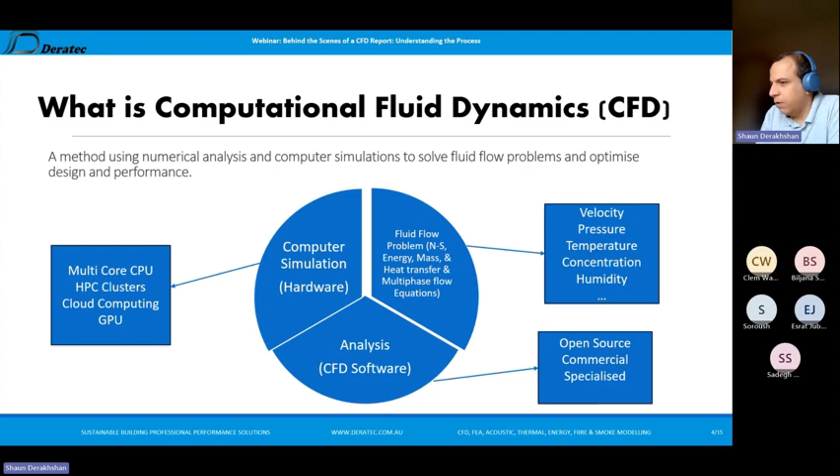We'll talk more about the softwares, just these few - I'm not saying I'm covering all CFD softwares in the market now, there are a lot more, but I selected some as examples. Autodesk CFD we are using is user-friendly, great for building and especially HVAC. It has challenges, limited in advanced turbulence, but it's design focused for a project, so it is very good for industry application.

ANSYS Fluent, well-known, and ANSYS CFX - highly accurate, advanced simulation, but expensive. Steep learning curve, not just user-friendly, a lot of modules, and it's very difficult, but it's best for complex simulation, more academic or cutting edge, or for industry if we have something very special case.

OpenFOAM, I said free and open source. It means free, but requires programming expertise in addition to CFD expertise - you need Python or whatever. It's customized application again - you can use OpenFOAM for very simple jobs or complex physics and customized ones.

Star CCM is for multi-physics, so it's when your phenomena is complex, very costly, and high fidelity simulations. SimScale just recently came to the market, maybe last 5 years.

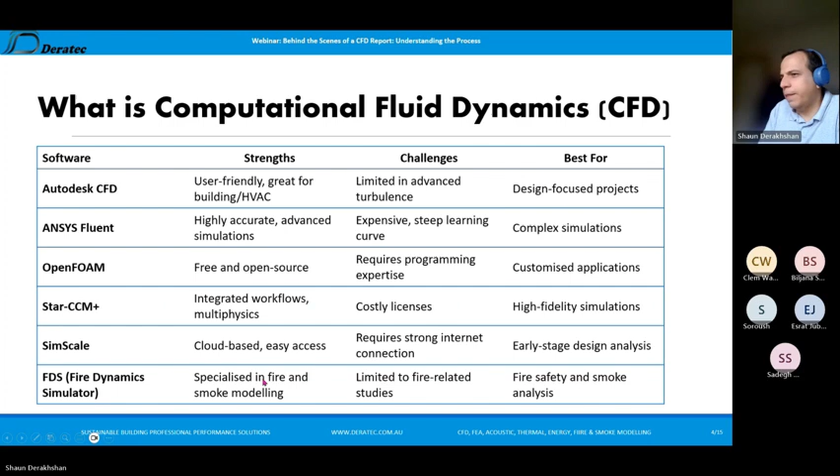So how to choose? Again, it depends on the application you need and also budget, a lot of parameters, and operator expertise. For example, learning new software is time-consuming, especially complex ones. Here at Deratec, we are using Autodesk CFD for reliable, cost-effective building simulation and FDS for fire and smoke.

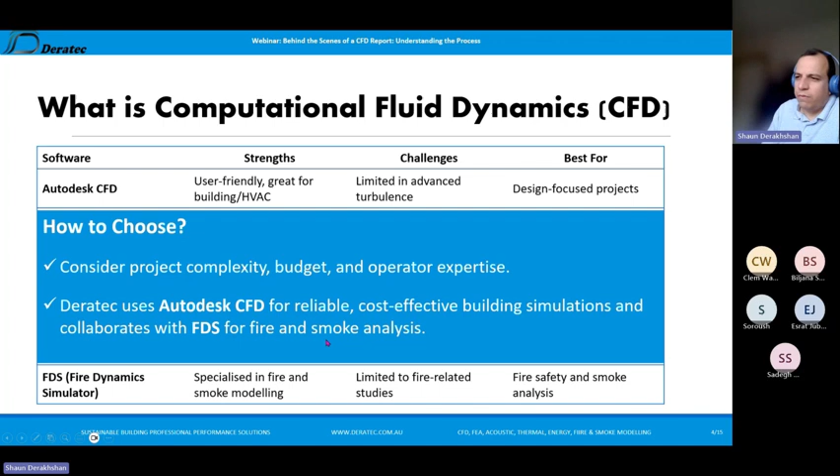So how does CFD work? First of all, we need to define project requirements. Identify, for example, when I'm using ventilation as an example here, identify ventilation needs, goals, and compliance with NCC or AS 1668.2.

So we need to define, for example, a car park or whatever we are looking after. The client or whoever is looking after it sends you something like a plan, maybe a jet fan or supplier information, whatever it is, just an initial design. We try to figure out what the goal is: first, meeting the standard, and second, and most important, saving money, saving costs. Don't forget, we are using CFD to save costs for our client, not just adding costs.

You can see here the jet fan and CO emitter, as a car moves and we have CO. Depending on the project, simple or complex, we need to convert drawings and project input into this 3D model, but kept simple, because CFD needs simple geometry.

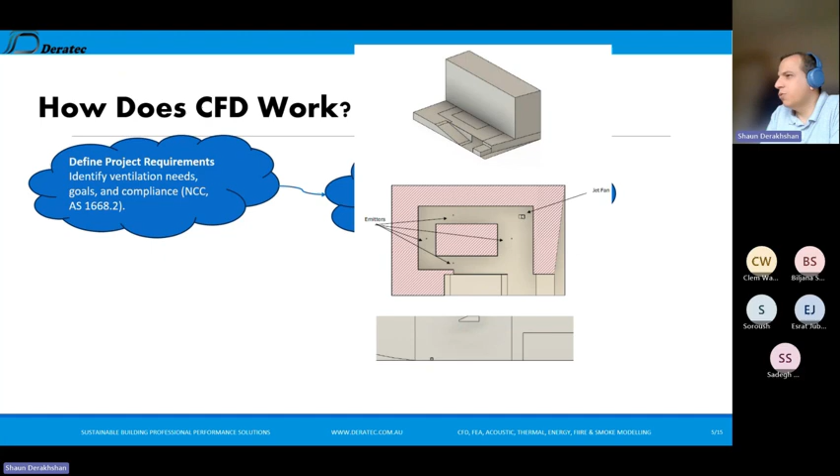Then we start CFD modeling. First is boundary conditions, setting up the model, mesh generation, and then the method, whether transient or steady state - a lot here is a big step, so it needs expertise and knowledge.

Everyone just claims 'I'm a CFD engineer, I can do it.' You need experience and knowledge, especially experience in that specific field, not just general CFD experience. For example, if someone comes to me to do CFD for biomechanics of the heart, definitely I can do it. But if they can find a CFD engineer with a biomechanics background, definitely he or she can do better. This is important - so for example, I'm not just a CFD engineer, I'm a ventilation engineer or mechanical engineer.

So these two combined help the final report be very practical and highly efficient. Normally our reports are approved straight away by the client or consulting engineers because we know what to do.

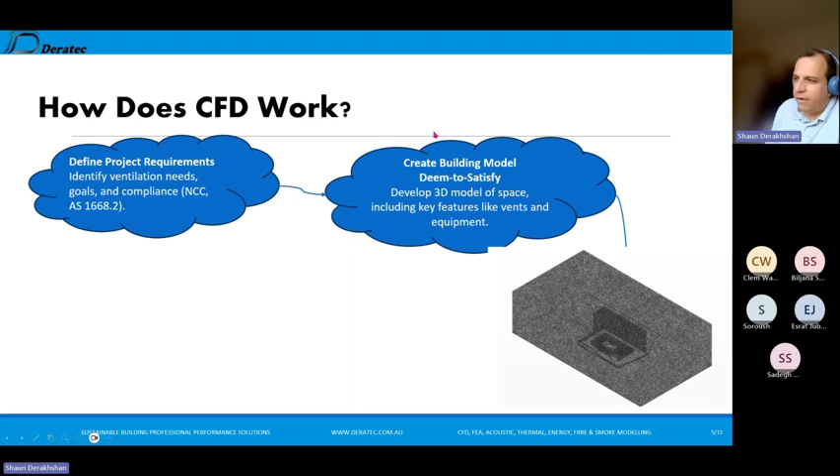So here is the domain. For solving the Navier-Stokes equations, we need to discretize the domain, and each cell or node needs to be solved by software and definitely hardware. For example, 2 million, 3 million meshes - this is the reason it takes time, from a few hours for simple geometry or simple problems, to, for wind comfort, we simulated for the whole of Sydney or part of Sydney.

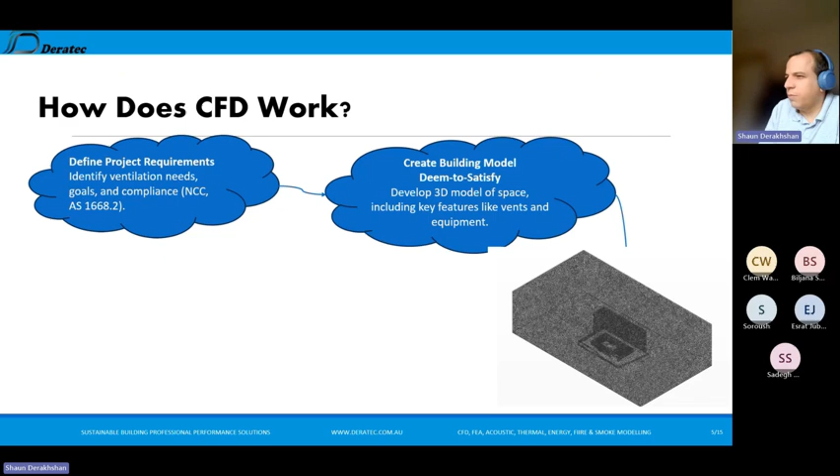It took around 72 hours with cloud computing, with Google Cloud, not just my computer. It was around, if I remember correctly, 30 million meshes. So it depends on the complexity - time will be different. This is the reason price is also different. This is the time involved.

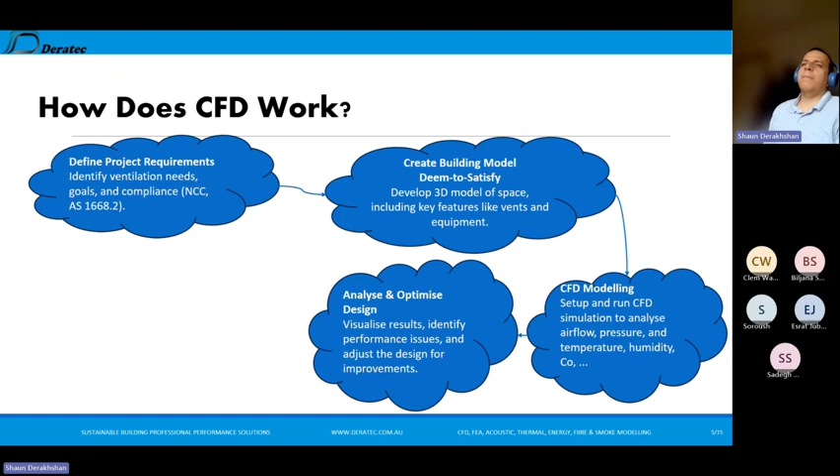So then we have post-processing, we do some analysis and have a look. If we need to optimize, we change geometry, we change parameters. For example, jet fan position, or adding or decreasing jet fans, to get the best result to meet the standard, and again save cost, because we don't want to add cost to the project. In some cases, yes, costs increase because struggles happen, but in most cases we need to save money for our client.

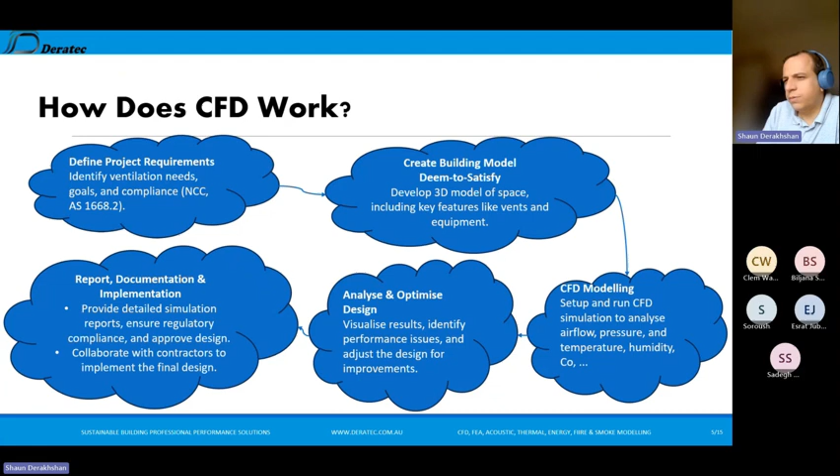And then report and documentation. It can be very detailed or simple, depends on the client. Some clients prefer a simple keep-it-stupid-simple strategy, just simple to understand. Some clients think a professional report means a detailed report. I'm not judging, it depends on the client. Report can range from very simple to very detailed. This is just an example, and then the report is sent to the client.

Benefit of CFD - again, the target is saving money, higher efficiency, and sustainability. These are the three main things we need to consider when doing a CFD report.

Starting from design: normal design by consultant is deemed-to-satisfy, not optimal design. This is an expensive solution for contractor or builder, and they call it 70-80% design. Most of them copy from other projects because they don't want to spend time, and just leave it to the contractor, subcontractor, or supplier to do the rest. So most projects need us to have a look and spend time to optimize - for saving money, higher efficiency, and system performance.

So we propose a design - client purpose, or an alternative design or performance solution to meet this goal. What are the tools? NCC accepts CFD analysis as a verification of this design. So again, we need someone with knowledge, experience, and qualification to certify - a chartered engineer or practitioner for class 2 buildings, for example.

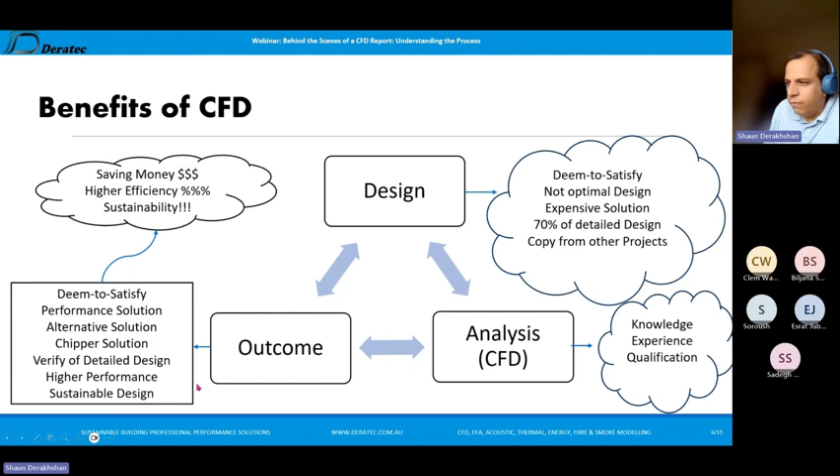Sometimes we're not looking for saving money, we just want to verify the design. For example, a fussy consultant engineer wants to verify her or his design for higher performance or sustainability - for example, you want to meet a higher Green Star certificate, and your solution doesn't meet that, so we review and help you reach it.

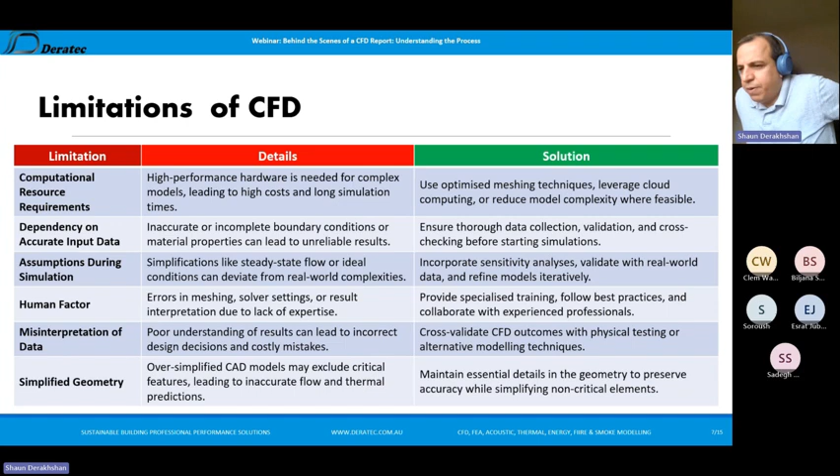So every good thing also has limitation - it's in the word itself. We don't have perfect things, so CFD also has some limitations.

The most common limitation is resource requirement. My challenge when talking to clients is that they struggle to pass accurate inputs. When we have accurate input, this can lead to reliable data, and unreliable input leads to unreliable output. This is very important - when we start a CFD project, all information needs to be passed to the CFD engineer.

As for resource requirements, hardware is challenging, but I'm not worried about that because a lot is coming - we have cloud-based solutions, and hardware is improving a lot. So now it's not a big problem, maybe only for very huge urban simulations, or where you need a very huge or very tiny mesh. This isn't a problem for ordinary jobs, only for big problems.

Assumptions during simulation are very important - for example, deciding steady state or transient, and you need to validate your assumption. Is the result reliable or not? Because we're always simplifying, we're trying to optimize - it means you get a good result with simplicity. It's not worth making the problem complex just to get a result.

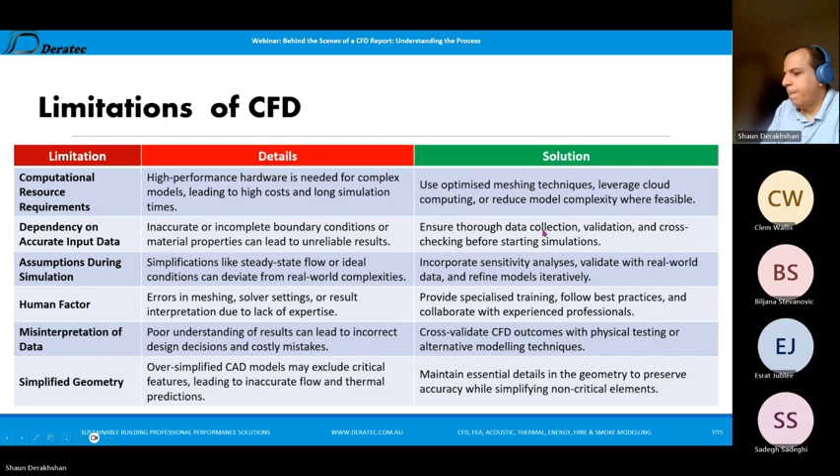Future of CFD. So I started CFD in 2000. The first code I wrote was in Fortran, and at the same time I bought this Nokia phone. Now in 2025, we're talking about smartphones, iPhone or Samsung, whatever. Traveling 25 years in the phone industry, getting from this very good, reliable Nokia phone to now, it's fun to look back.

But the question is, in 2050, what will happen in the phone industry or communication? Maybe each of you have an idea. I don't know.

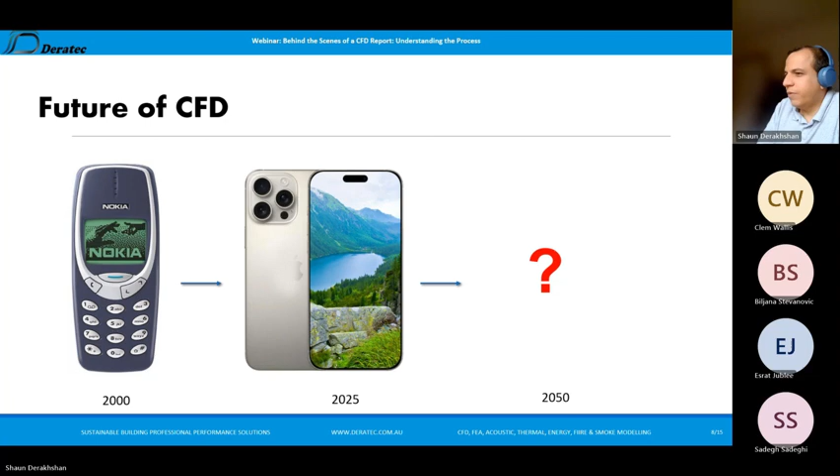Similarly, in 2000 I wrote 2D code with Fortran for NACA 0012. It was very challenging, just with a Pentium processor, a lot of challenge to get this simple result that now I can do for you in one minute.

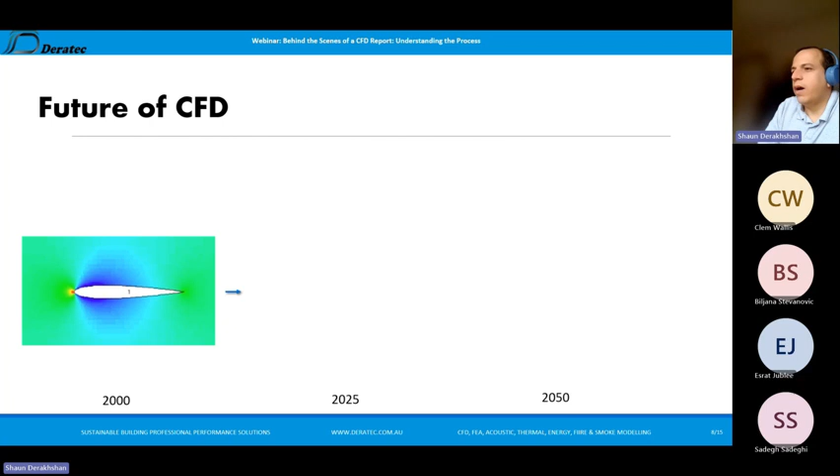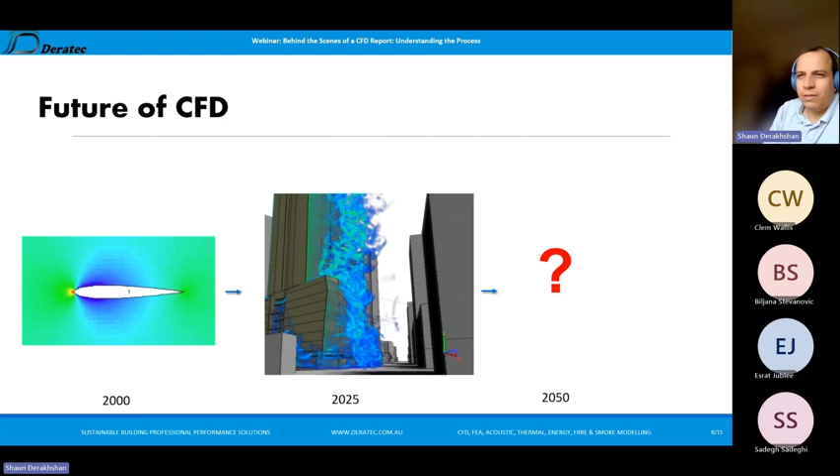In 2025, we are able to do 3D simulation for urban wind simulation, even more complex. And again, the question: what will happen in 2050, in 25 years? This is important to know, because as a CFD engineer, or you as a client, you should know what's happening in the background in CFD development.

Also integration with IoT, for example real data, installing sensors - it is my favorite one, smart buildings. This will happen a lot in this area in future. For example, at the same time with glasses or your phone, you could see real CFD, look at the louvre, and see the airflow come in and where the simulation is going.

No need to ask, call me and say 'Shaun, can you simulate this for me?' No, just with some simple app or simple glasses, you can see the real phenomena happening. Okay, maybe it's not 100% accurate, but 50% is enough, because you just want an estimation in your design or installation.

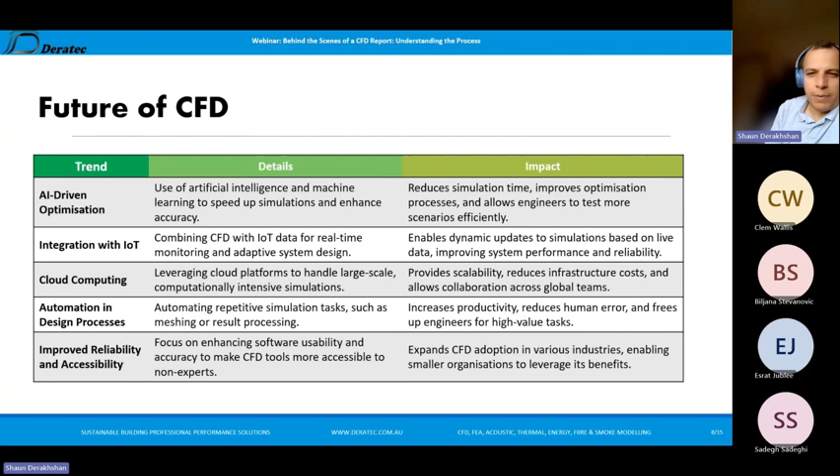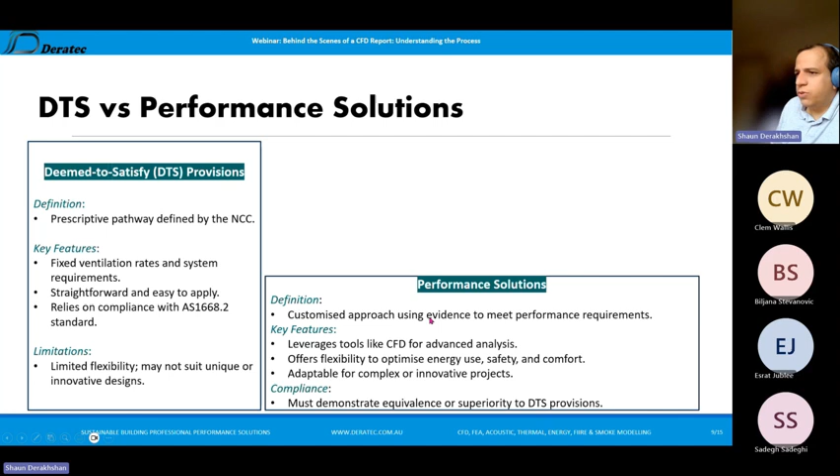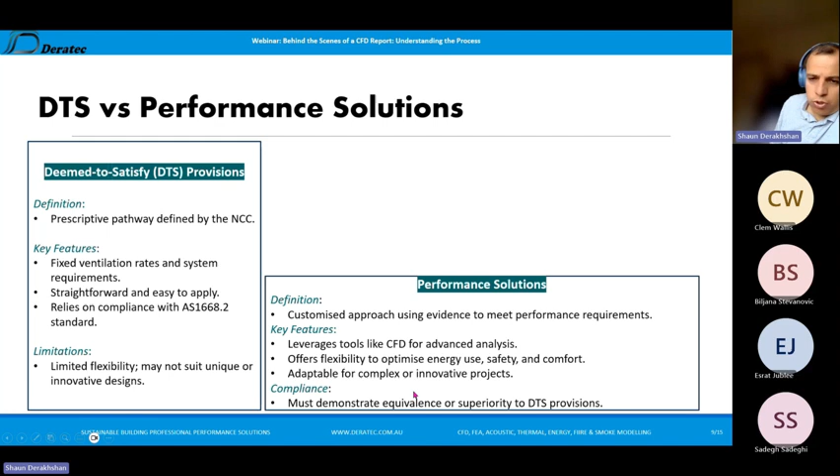You're all familiar with DTS and performance solutions. DTS is just something that's fixed - for example, ventilation with a fixed ventilation rate, straightforward, relying on standards. So it's very limited and not innovative, but it's easy, very easy. Performance solutions, in contrast, use a customized approach and advanced analysis - innovative, sustainable, cost-saving, everything involved. But we need to show that our performance solution is at least equivalent to, or better than, the DTS provision.

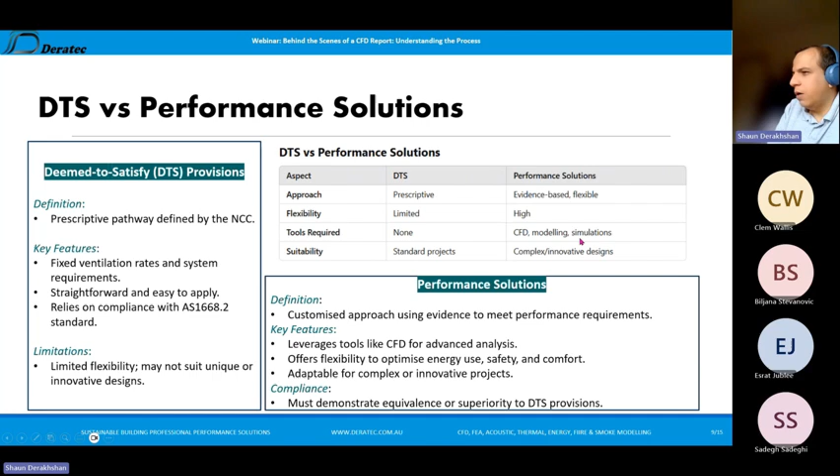So here's a short table - approach, flexibility, tools required, and suitability. We can see that DTS is very simple and easy to apply, but performance solutions offer higher performance, higher flexibility, with more cost involved for the CFD analysis, but a lot of cost saving overall. You will see in our case study how CFD analysis can help you save money.

So, CFD application in buildings. We have two categories in buildings: one is indoor - HVAC, ventilation, thermal comfort, air quality, energy efficiency. It can apply to offices, schools, hospitals, data centers, car parks, kitchens, green buildings to achieve green star ratings, plant rooms, substations, warehouses, and battery storage.

We worked with Toshiba in this field recently. For example, this is smoke or CO level simulation in a car park, 3D animation, and whatever else we can do.

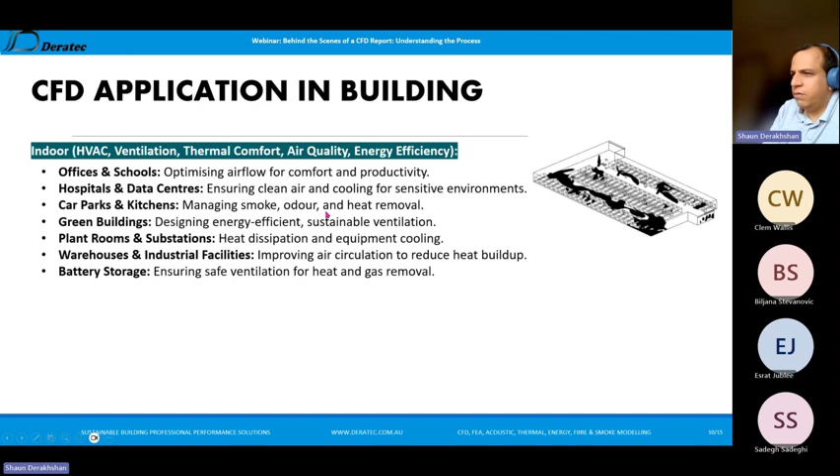And definitely outdoor. Main is wind study, wind load and wind comfort, but it can also be energy efficiency, for example facade or sun, and then rain and water. We are able to simulate rain and water penetration for facade, window or louver, and pollution, dust or just normal environmental pollution - we can apply it outdoor.

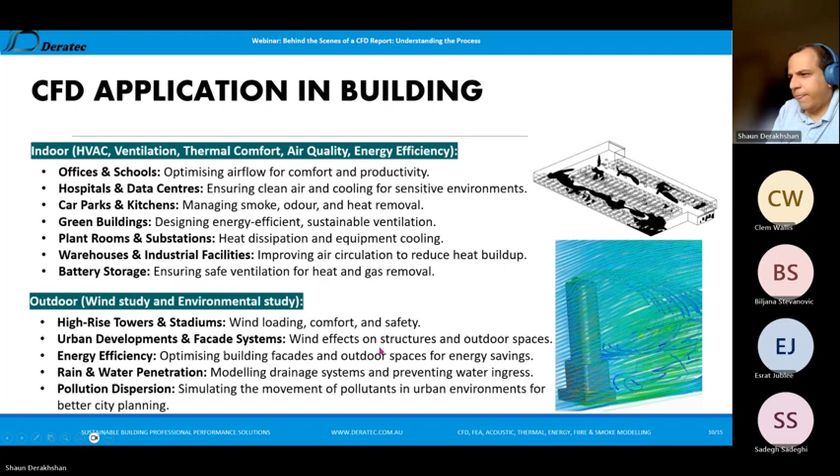So initially it was 18, fresh air intake from supply and definitely going out from exhaust. Also the parking ramp is a supply air that we are using normally. When engineers design, they ignore this, but when we are doing safety modeling we can see how much the parking ramp helps to decrease supply fans, and this is the benefit of safety analysis.

So what we did: we simulated, then recalculated and optimized the jet fan quantity and position, and also the air circulation - we decreased air. So jet fans decreased to 12 from 18, and we keep the 1 hour average CO at 45, while the code says 60. So we're under the criteria, which is good, and the 1 hour maximum of 85 is still good.

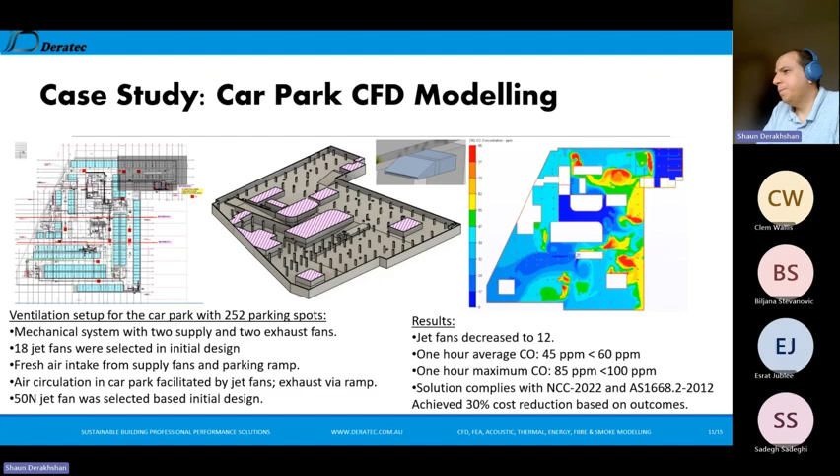And definitely the result, for example the CO level, is here. So I'm trying to keep track of time to give you around 10 minutes for questions, because I love to hear from you, not just me talking.

And yeah, we're talking about PMV and PPD. So definitely, if they want to use mechanical ventilation, for example fans, that's very huge capital and also running cost.

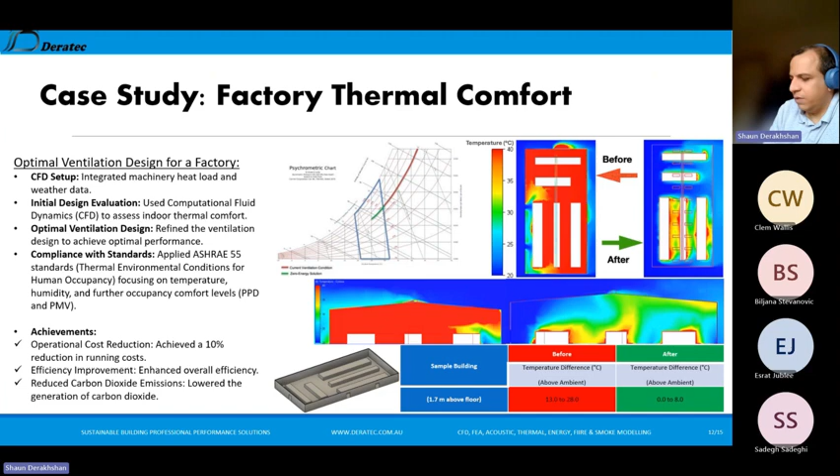So what we learned here is, first and most important, CFD enables sustainability and cost-effective design. This is very important because when a client comes to a CFD engineer, giving cost means adding a cost to the budget, whatever the project or code is. But what's the gain? Is it cost-effective design or sustainability? You can't just add problem to problem.

So when we talk about CFD application, some engineers just want the best technical result, and that's okay, good, but we are talking about optimization. We need to look after our client and stay balanced between cost and accuracy or efficiency. This depends on the CFD engineer. It's a very key person, who can save money for you or just kill your budget.

Reliability requires quality input. A lot of the time when we start a project, we ask for information, but maybe it's not available or it's only partial. So this damages the outcome. It's important that the client tries their best to gather more reliable and complete input. Then the CFD engineer can apply all of it to the model, and the result will be reliable.